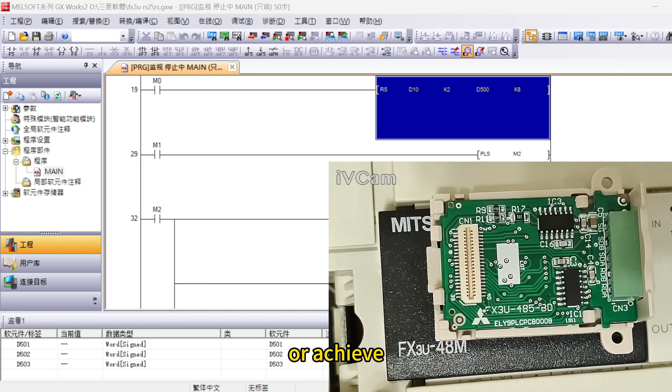This is our requirement. You can see here the FX3U-485-BD board. It needs to be installed in the expansion slot.

You can see that it has four pins SDA, SDB, RDA, and RDB. But actually for 485 users, only two pins. So you need to connect both the pins SDA and RDA together, and both the pins SDB and RDB together. Just connect here with the wire.

This is how I connected it. I used DuPont wires to connect SDA and RDA together, and RDB and SDB together. These two wires go out.

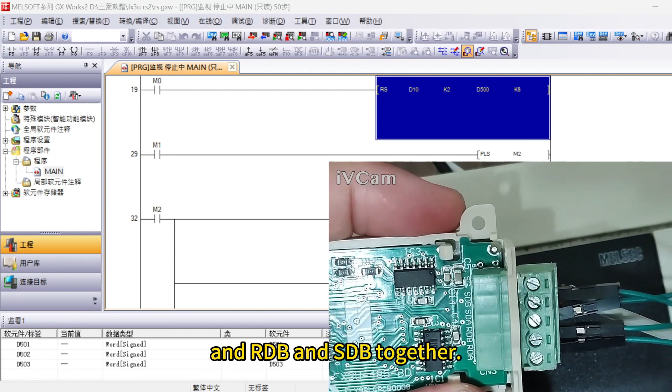For the receiving end it's the same. Today I'm using a computer to receive. I'm using a USB to RS485 cable, connect A to A and B to B, then connect the two wires. Today our hardware testing environment ends here.

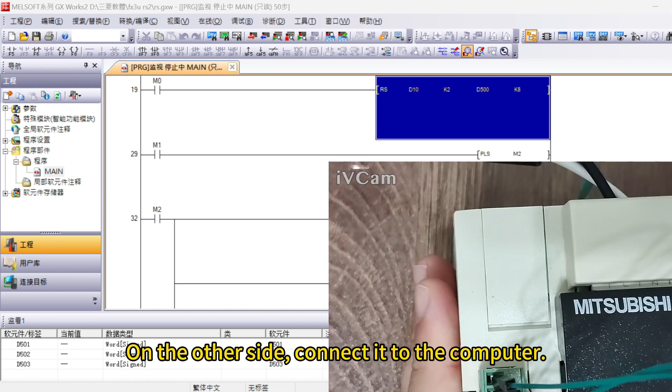Next let's talk about the software part, how to do the testing. This is how we installed it. On the other side, connect it to the computer. Okay, now let's move on to the programming part.

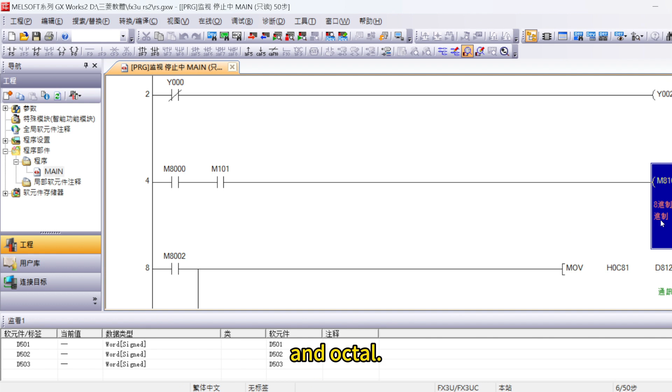You can see the program part, it's already written. The upper part is the previous version live program. Next line is M8161, which lets you switch between hexadecimal and octal. The most important is the D8120 parameter, because D8120 includes the communication position, length, parity, and data matching.

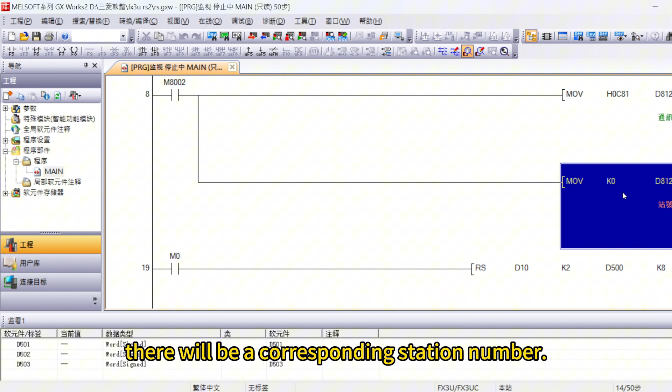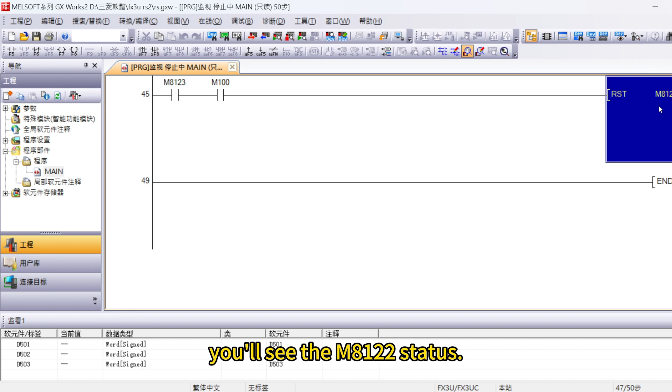Next is the RS command. The RS command has the first parameter indicating the starting position of the data to be sent, and the number of positions to be sent. Today we're sending 2, only D10 and D11, because when we trigger it you'll see the M8122 status, only sending 2. The received data starts from D500.

It starts collecting data. When it finishes collecting data, it will trigger a bit telling you it's done collecting. Then you can move it somewhere else and reset it, then it can collect data again.

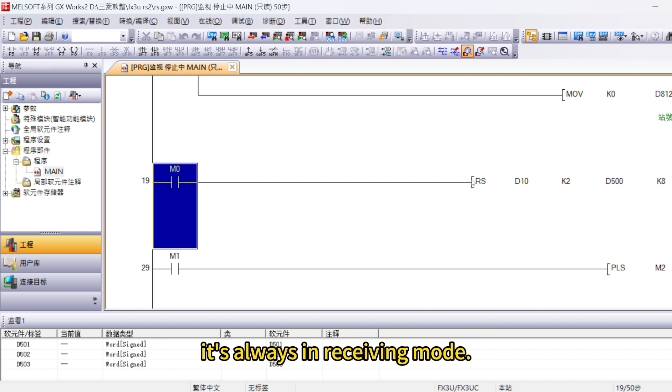But you need to understand, when you trigger the RS, it's always in receiving mode. If M isn't on, it won't receive the full send data. Trigger M with a pulse - remember, it needs a pulse.

After M2, it sends an M8122 pulse. It sends the data in D10, both values, out.

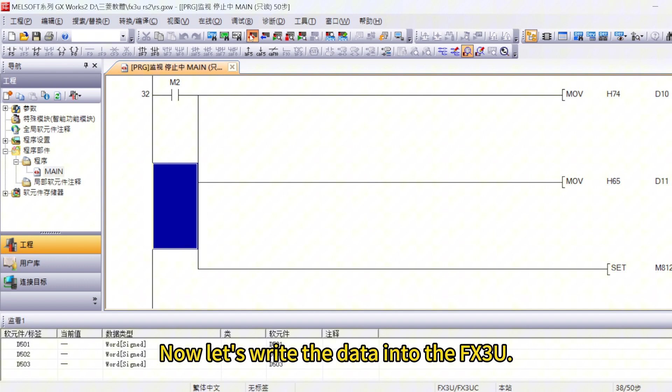Alright, let's start our test. Now let's write the data into the FX3U. It's written in now, let's do a monitoring action.

Now the biggest question is, how do I know if it has sent the data? This is the most common question. The answer is the same - still use the MODBUS group, the bottom left position.

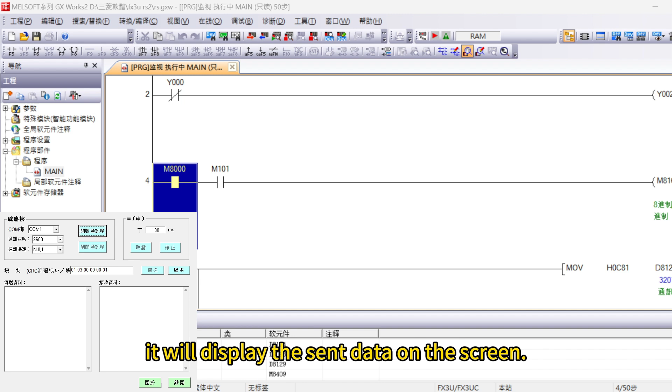Set the same communication parameters as the FX3U. Then it will display the sent data on the screen. Set the correct COM port. After opening it, it will start receiving continuously.

So when you want to send data, what should you do? Turn on the RS command. It's in receiving mode, then it can receive data. The bottom part is blocked - this MODBUS communication software is placed in the bottom left corner.

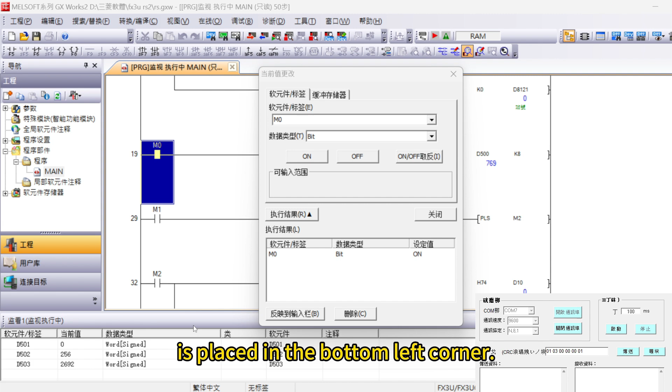I'll stop it first. If D500 receives data, there will be a value here. Let's do a test, let's send the data now. Can you see it? Is it changing here? You might not see the value clearly.

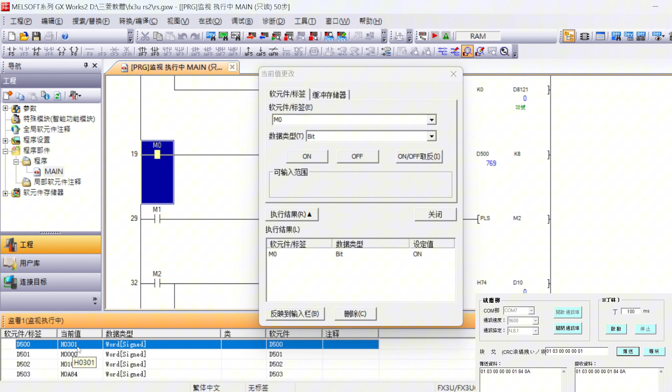What's 769? Let's convert it to hexadecimal. 010300000001840A. Is it the same as the sent data? Same as the sent data. So it means the device has returned the data correctly.

Now let's see if it can send out. If it completes the sending, if the output is completed, it will receive the data here and display it here.

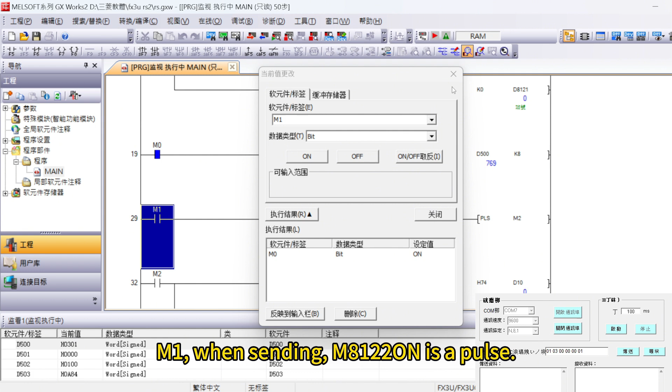Alright, the method is explained. I'm always in the transmitting and receiving state. M1 when sending, M8122 is a pulse, it sends out the data.

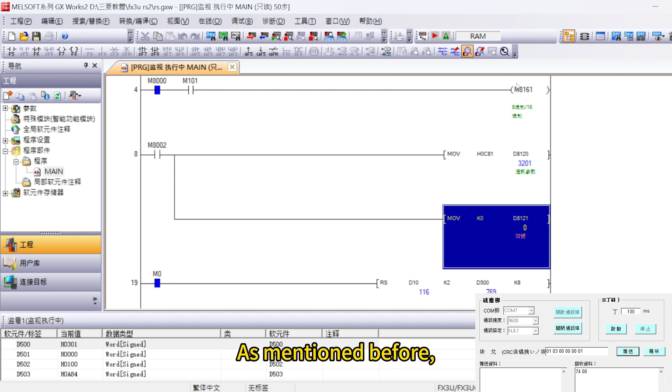Now we can test again, as mentioned before. M8161 is the switch between 8-bit and 16-bit mode. Let's turn it on, send it again. Do you see the difference? 7465, so this is low, both high and low 8 bits.

It only sends the low 8 bits, it doesn't send both high and low 8 bits together. It takes the low 8 bits of D10, low 8 bits of D11, and sends them out.

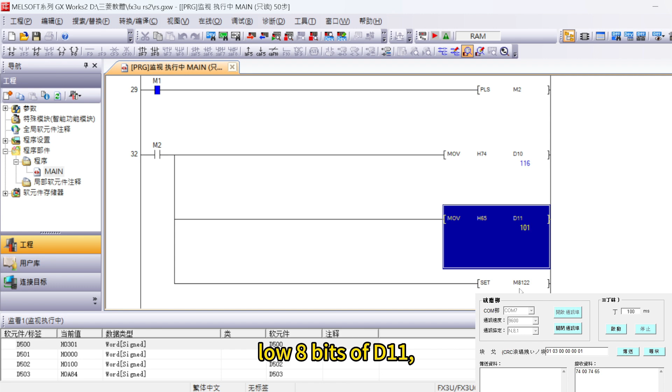That's it, we've completed the RS serial transmission. We can schedule to send and receive once per second, or whatever you need. These are your applications, but you can see if the RS is on and you keep sending data, the communication...

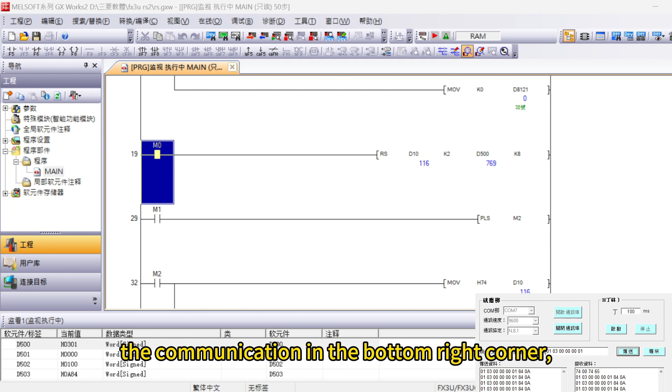...in the bottom right corner, it will keep receiving. You can check, after 0, send it again. Why not now? Because it's full. You need to reset it first, then send it again.

Receive 0103, now it's in 8-bit mode. Each D sends low 8 bits. You can see it, it's like this. Send it again, so it's there.

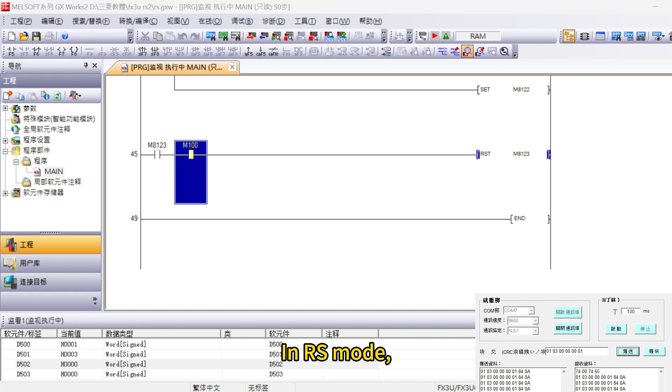It keeps sending because we didn't move it, so it keeps sending. In RS mode it keeps sending. Turn off the RS command. Now check D500, you see it doesn't receive values when sending.

D500 has no value. So the RS command doesn't mean it's always sending when it's on - it's always in receiving mode. Now let's talk about why it receives every time I send.

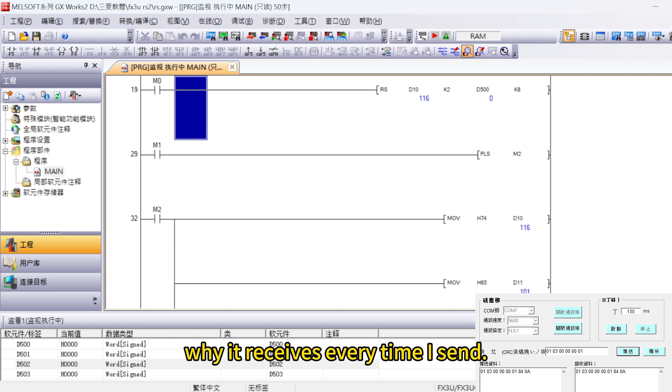When I send, it always receives. When wiring, RDA and RDB connect to SDA and SDB together, so when you send, you also receive. This is normal, it's a half duplex stage.

When using it as half duplex, you'll encounter this stage. When sending, you also receive.

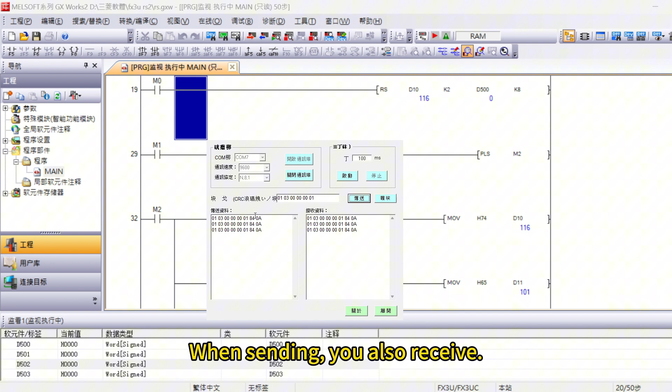Alright, some students use the 422 module as 485. This situation occurs - there are two situations. 485 will filter out the send commands, but if not, you need to combine send data with return data, combine both, receive all to get the real length.

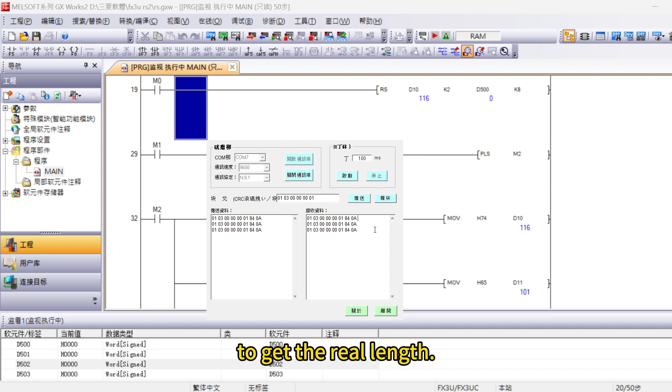Alright, this is the RS command explanation. That's all for today. Thank you everyone.